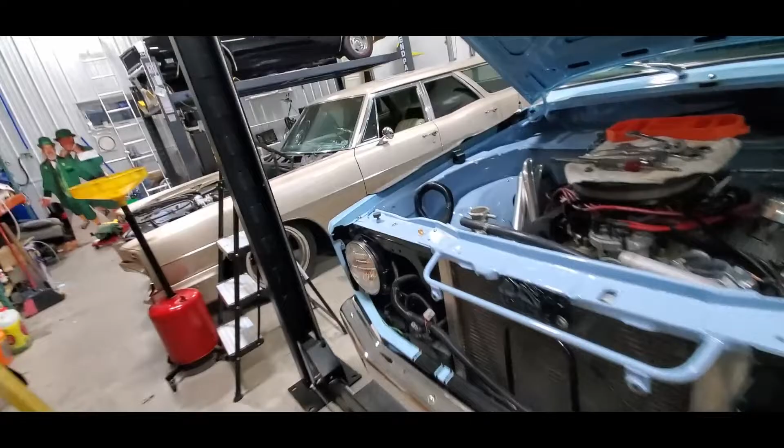ShopDog's excited because we've been out here working over the last few days trying to figure this out. This is actually a real pain in the neck. So every time I've got a few found moments, I've been trying to sort out how we're going to do this. I underestimated how difficult this part of the job was going to be.

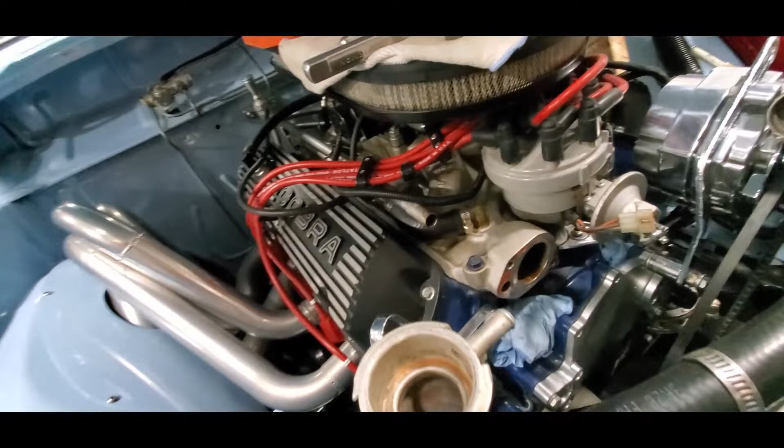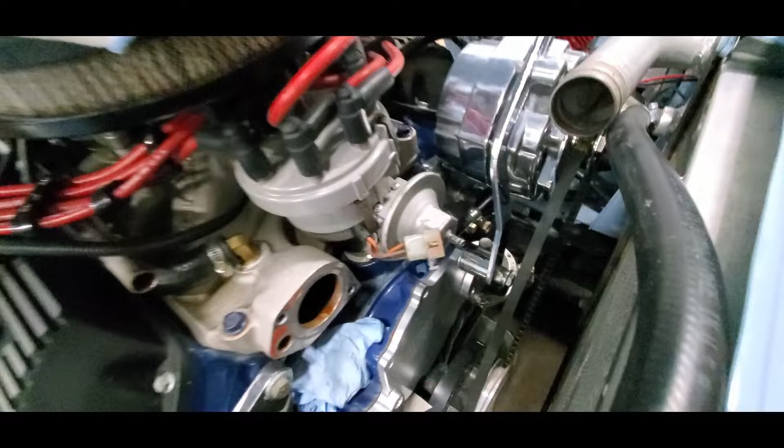Going from that tiny little Mitsubishi alternator, which is probably like 45 amps, to a 100 amp alternator, I knew that was going to cause some issues, especially since we're taking the water pump away. But no matter what I'm doing, I've been playing with different bolts, lengths, offsets, and some brackets off the floor and off the things. You can see there's even a socket there.

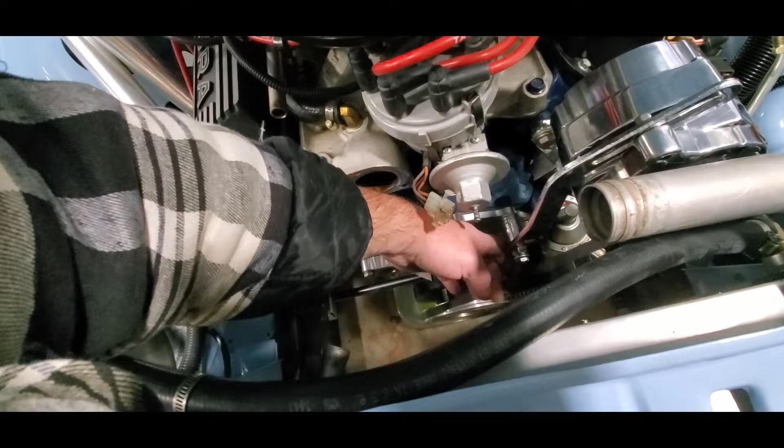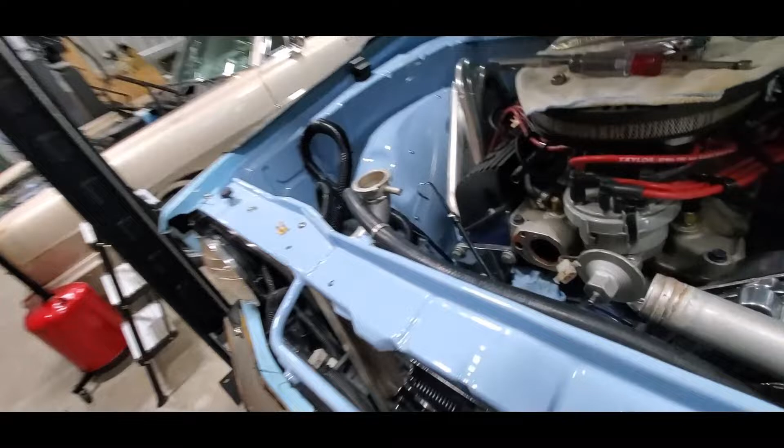This was actually one of the most promising positions that I had found. And then, of course, the obvious thing is the motor for the electric fan interferes here. And I run into problems where I'm either going to be running into this hose or this, so I've still got to pull that out further. The upside is that gave me the best clearance to that hose. But one thing at a time.

This has turned out to be quite the complicated problem to solve. So I haven't been filming it because it's been a lot of me just playing with bolts and spacers and sockets and stuff, trying to figure out where I can place the alternator.

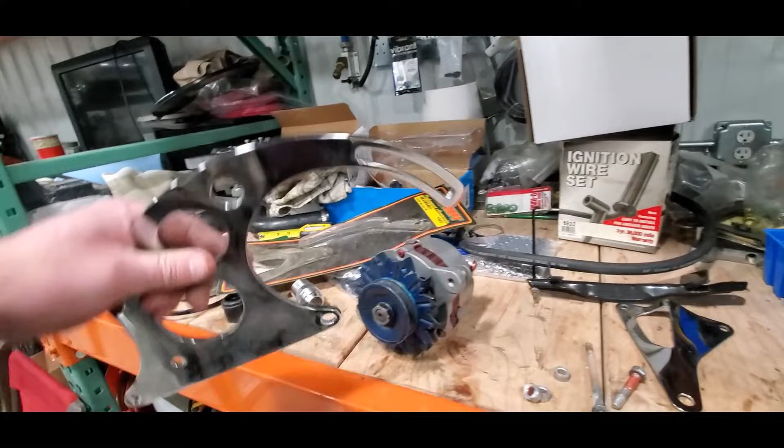I really had hoped to use the original bracket, this thing here, in some way, but this fits this cute little tiny alternator. It does not fit a regular normal size alternator because this looks like it's based on like a 10 SI or a 12 SI. Well, look at the fan, it's a 12 SI case. So that's not going to work out well for me.

So working on that. But I figured I've been putzing on this, I probably got 4 or 5 hours here, haven't filmed anything. And I thought it's probably time to do an intro, because I'll probably putz on it a little more this weekend.

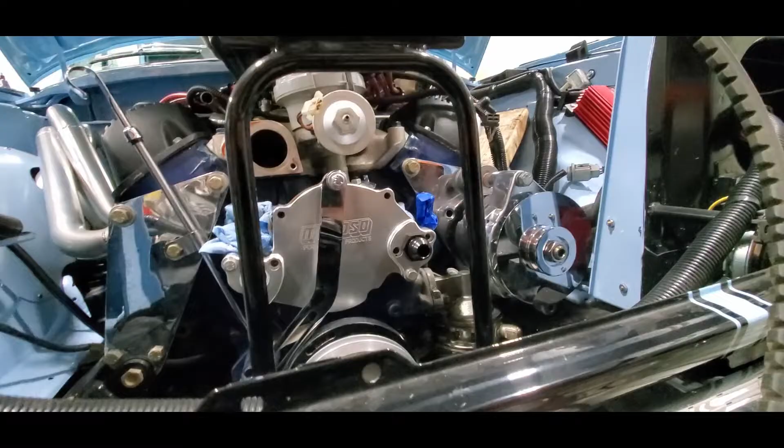Now, this is a spot I have looked at before, and unfortunately I just wind up having to cut too much car away, and then we got to go to an electric fuel pump, and yeah, this idea kind of goes quick. And I've already tried moving it down lower and swinging it out, but then I wind up moving too much of the body, which I'd really rather not.

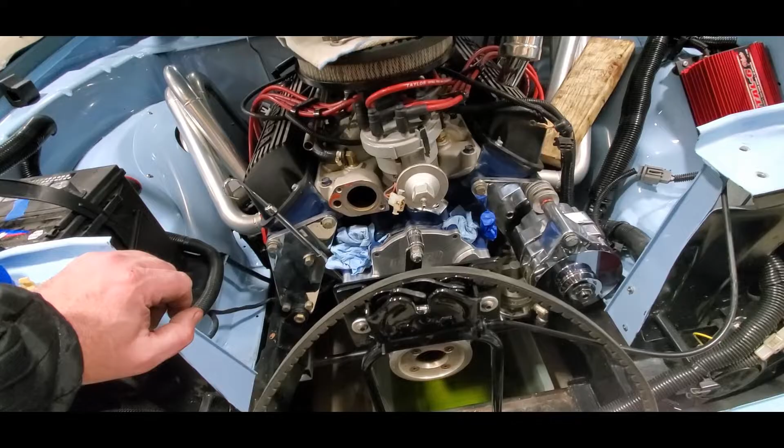And from this point, not a lot of pivoting either. And no matter what, if I use this point and try to pivot up high, which of course still has the same belt problem, I have to machine some of that out. So just still thinking, there's a solution, I just don't know what it is.

But one thing I do know is the back of the alternator cannot be against this plate. It puts us out of alignment by about that much. So still thinking, I'm probably going to have to make a new adapter plate. Maybe I can put this pivot point way up here somehow and pull the belt. Not sure yet, got to think on that.

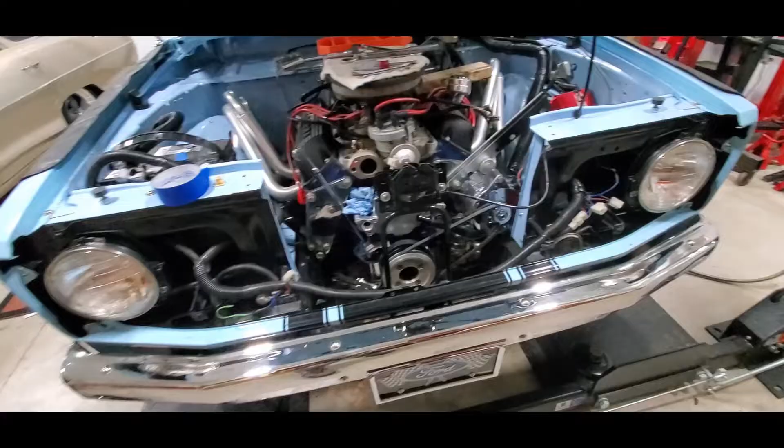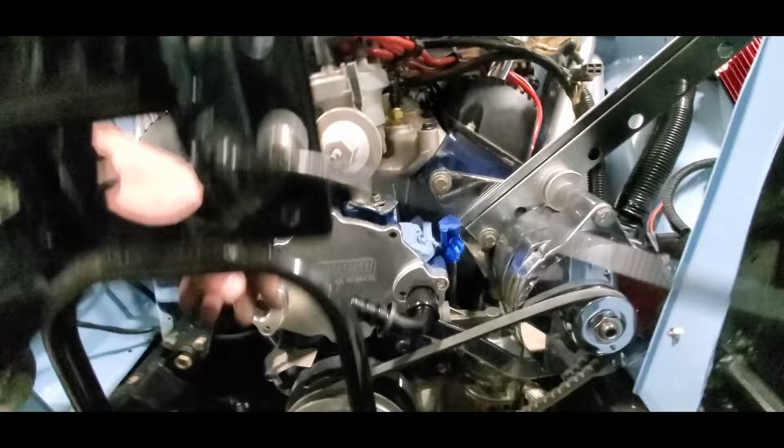Alright, I think I'm heading in a direction I like. So I'm going to obviously have to make a bracket, preferably something that locates at all 3 points, comes out, becomes a solid mounting point that will clear the head. And of course I've got to make sure I've got enough swing room, so I'm probably still going to have to modify that solid mount just so that there's room behind that. Because I can space this out a little, but I would prefer to move the alternator back. So there's some things that have to happen there.

It's not going to be fun, but we might actually just redesign that entire plate to have that mounting point and just have it cut. So that may actually wind up being the best solution.

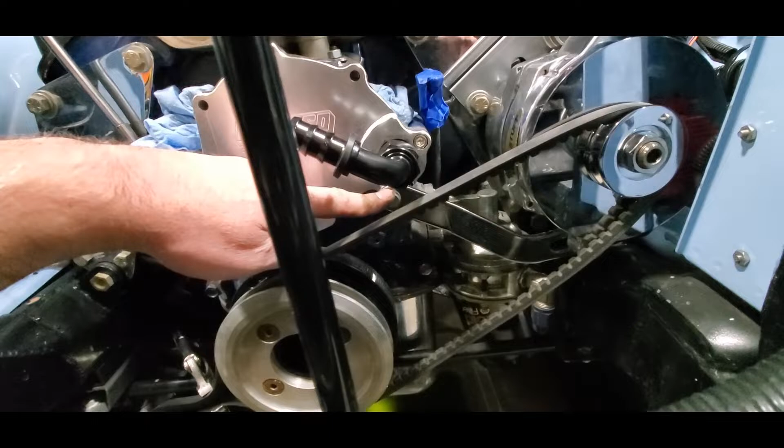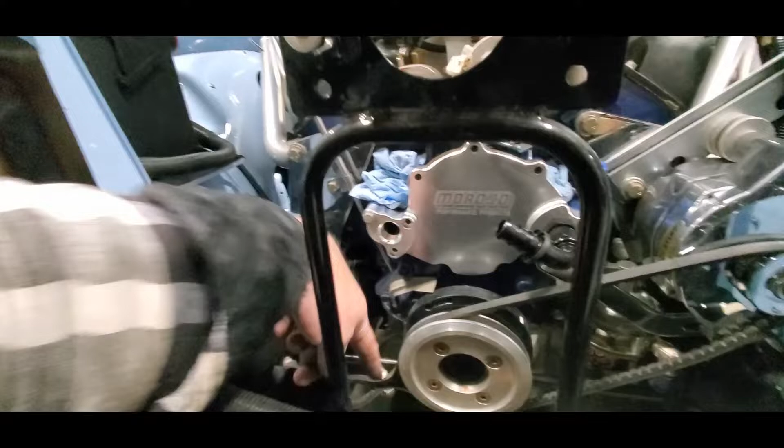I'll deal with that. What I'm looking at is I can use this point as a reference because it clears all of this. I'd want to put a stud in there, because the last thing I would want that to do is slide. You don't want to go loosening because that goes into water. So there is that. So I would want it to be a stud because you got to loosen it to tighten the alternator. But then, if I had the right length belt, you can slide it a little bit.

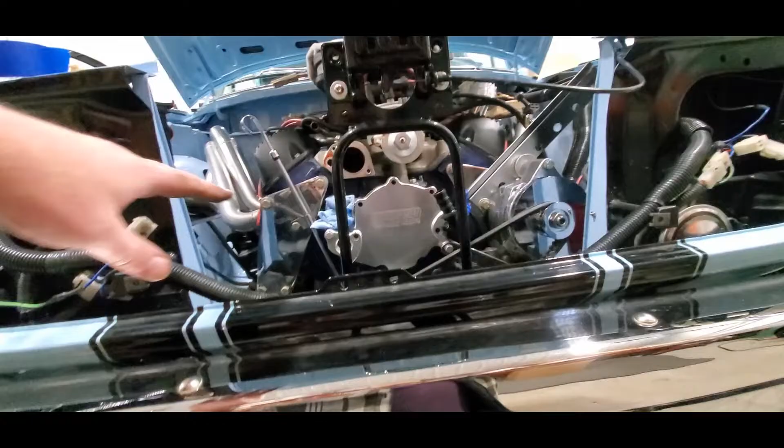The easiest way right now is like that. And that would clear, not only would it clear the hose and everything, I'm pretty sure it's going to clear everything. Give me a minute. Looks like that would give us plenty of room.

So putting it flat up to the top gives us gobs and gobs and gobs of room to the crank. Gives us plenty of room to run our hoses. You know, got to get creative with the angles, but that's why we bought so many angles. And like I said, if I had to shim that out a little, I can, not a problem.

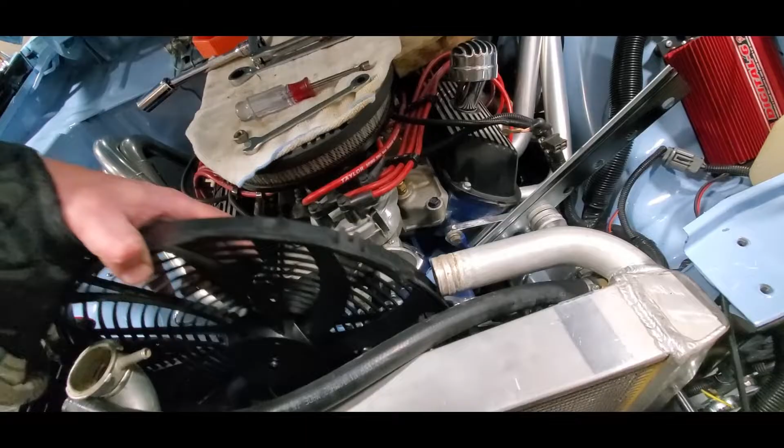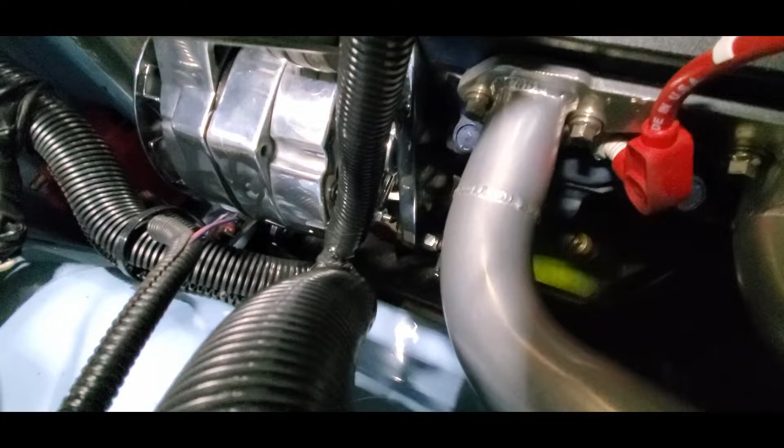So that shows us where we still have to deal with the water pump, and obviously I've got to design this plate. It's not going to be fun, but I wonder if those dimensions exist online or if I'm going to have to trace that and pull it and make measurements of it. That's probably what I'll have to do. But once I do that, if we just cut a new plate, yeah, it won't be chrome, but that's fine. I can put the bolt and swing point wherever I want it. That actually wouldn't be a bad deal, because that's the front motor mount for the motor plate.

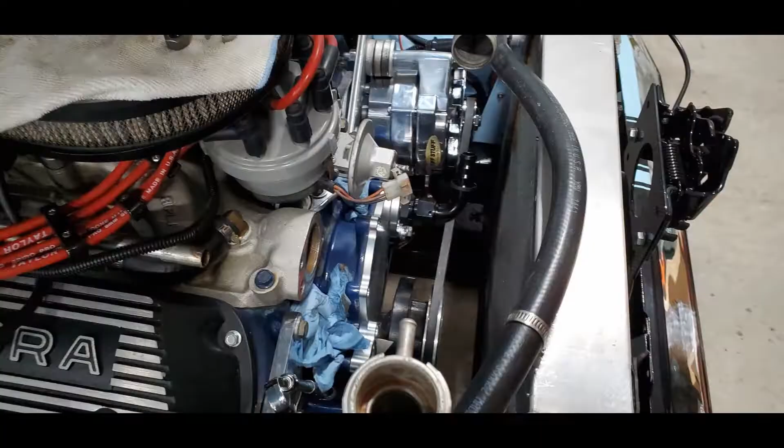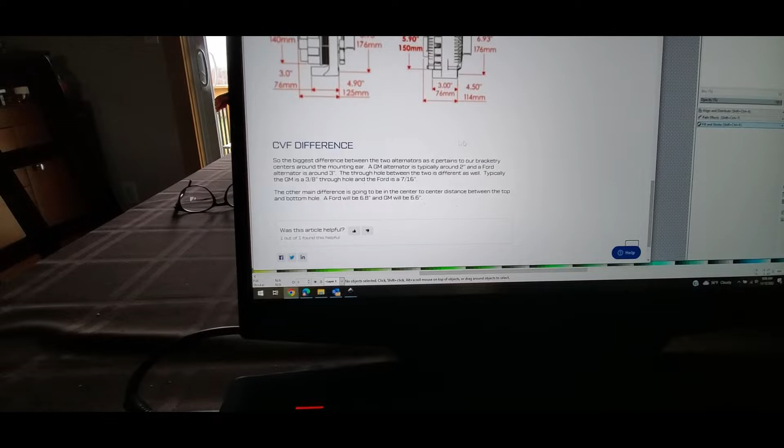Okay, I've started the modeling based on the alternator we have, which looks exactly like that because this is the part number, that's where we bought it. So when I go to CVF, who I trust for dimensions, they say that a 1G case has these dimensions, and the 3-inch thing I don't care about. The big thing being the 7/16 hole, and it's going to be 6.8, whereas GM is 6.6. That's all fine. So this is the top hole, the one that's got that 3-inch bit.

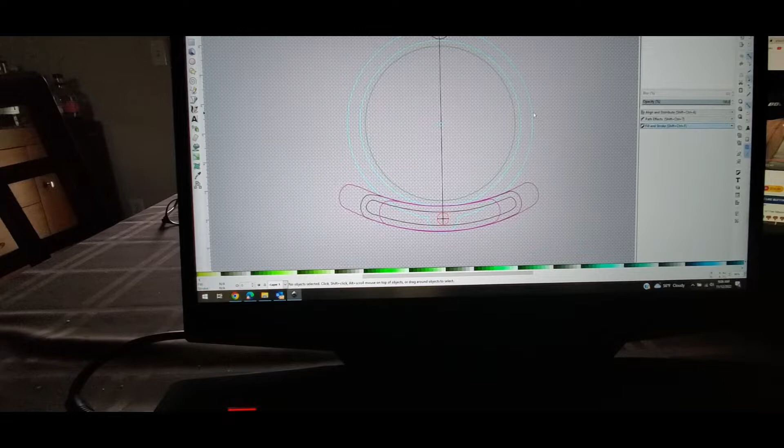This is the alignment hole. This is the slot that I've designed. So if I take that, you can see, so that's going to be the channel right here. This channel right here is the slot.

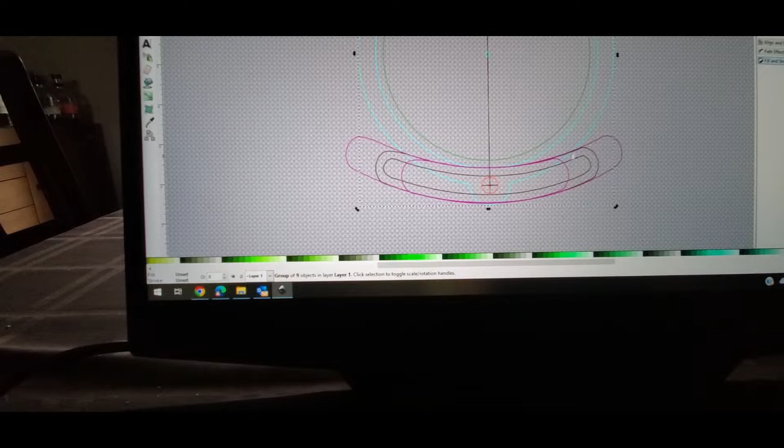Unfortunately, I can't get as much width here as I'd like, but this should work. I don't know where my bounds are yet because I don't know where the mounts are yet. There should be a hole here, a hole here, and a hole here, and then the plate going down. I've also got to measure this because I need to make sure the plate clears the back side of the alternator.

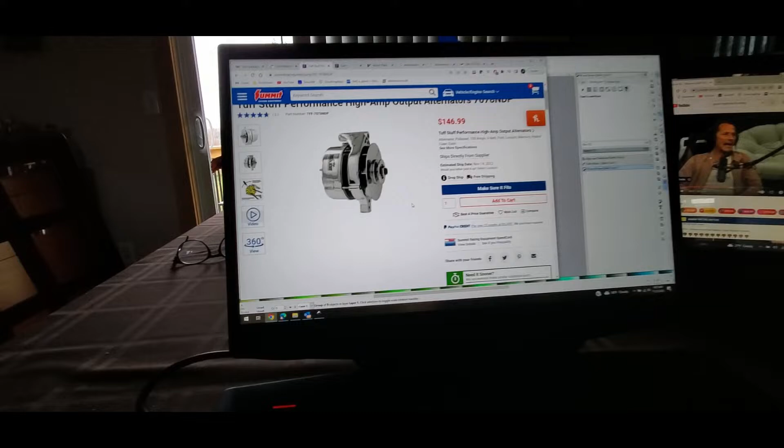That looks like they're not going to show me, are they? Okay, well anyway, you've seen the back of the alternator where the bearing rides. So that's one of the things I've got to work on.

Okay, before I start looking at what my limits are, because obviously that fuel pump's going to be one, I need to verify my alternator. I'm also looking just to make sure I don't have any other issues. I think there's nothing, if I can keep it mounted low with the radiator and the fan, that's a concern. So I'm going to go ahead and get that out of my way.

The next area I'm curious about is obviously right down in here in the fender well. So let me look into that.

Okay, we're still trying to verify exactly where the hole is. So I made a little—and this is too thin, this wouldn't work—but made that because one, I'm going to need to know where the notch needs to be here, but two, I'm really trying to locate that hole to a known position. And if it can be in plane with these, that makes it a lot easier.

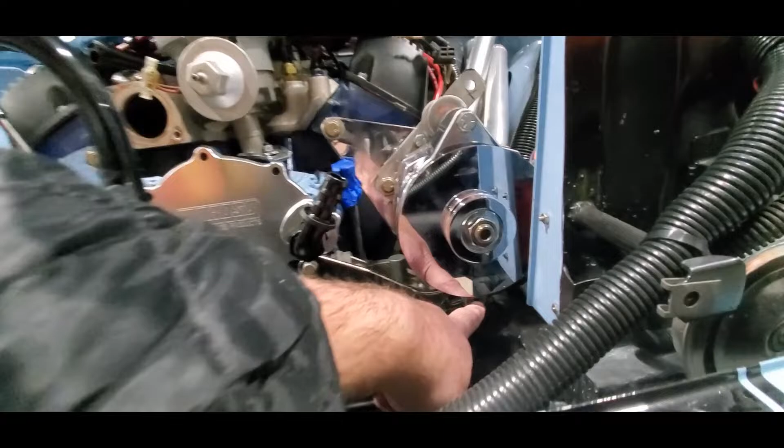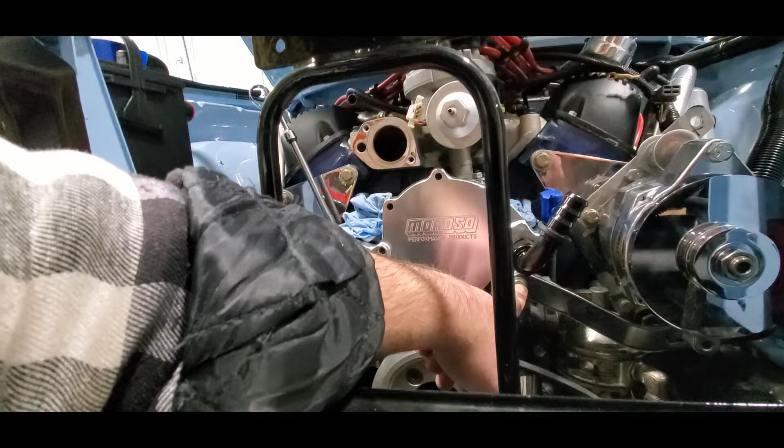All right, this is for in my head. It's not going to be fun to measure, but you see this slide down here, maybe you guys can see it. I don't really want it referenced here. This is one of the long bolts that goes into water, and I don't want that to ever have to get loosened. So what I'd prefer is maybe we take these two bolts and kind of reference that. It arcs down, comes over, and then becomes that little cradle, kind of like what I've drawn here.

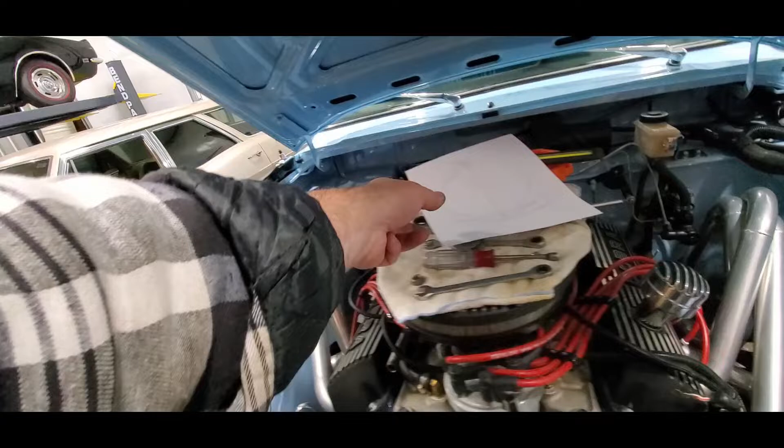Ideally, I want to be able to put the belt on with it in this position and have the belt tight between here and here. You can see when we come down here that I actually have quite a bit of room off axis. Remember, I'm going to move those wires—they won't be there. Won't have those next to this spinning fan.

In fact, right now, I can't really come in any further than that. I'm not sure what I'm hitting. Nothing over there, could just be the end of something, but it doesn't matter. So get the belt on, boom, tighten the belt, that's the idea.

So, ShopDog just said someone's here. Just a little update here.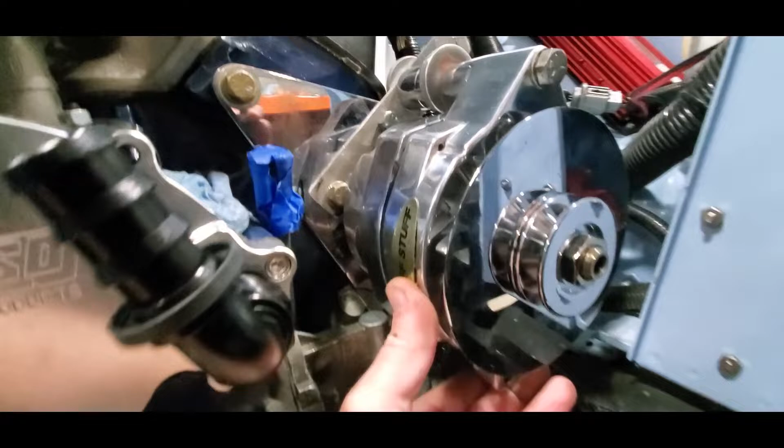Okay, I've got that bracket off, and I just wanted to check my extremes here. You can see I'm hitting something here, I have to figure out what. Oh, I think I know what. Yeah, that was just that stud, which could always be re-indexed.

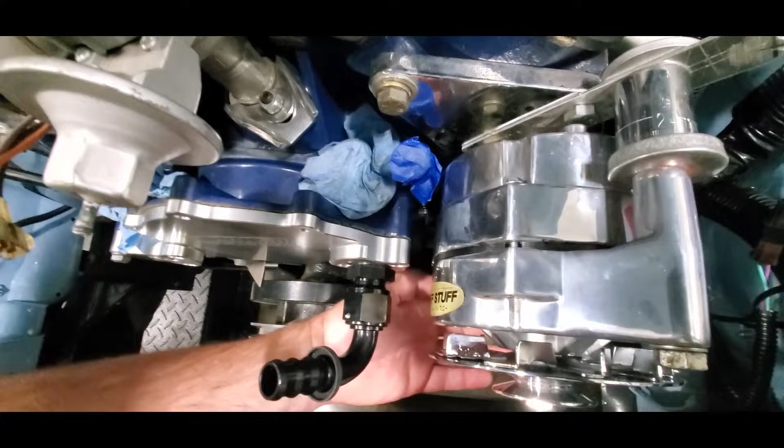Okay, so you can see I'm that far in and can go that far out. That is a lot of adjustment room from that point. I can clear the fuel. I think we're going to wind up with a user serviceable filter here, not the one that comes apart that we have in there now.

Oh crap, I don't know where I set it. Anyway, it doesn't matter. It unscrews and obviously can leak, because that happened to us. So we don't want that.

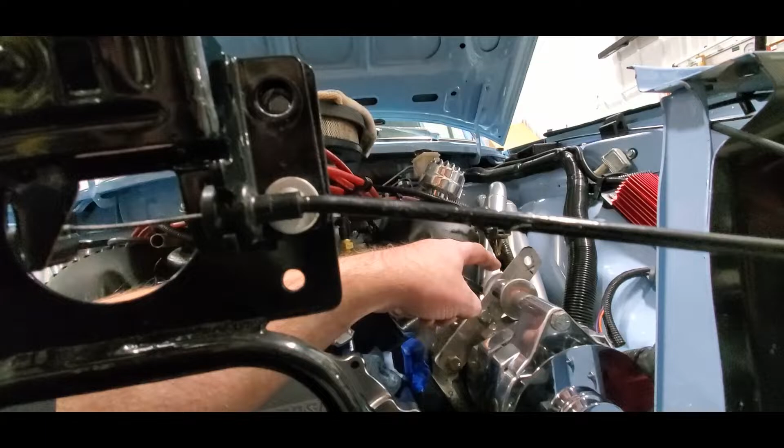So I think this is definitely—I like this hole location. It frees up a lot, especially if I'm going to go ahead and hog out the plate. The other thing is, of course, I'm going to square this plate up a little bit, because once I take some out of there, I don't want to lose any strength, and there's really no reason not to go ahead and do that. So we'll do that.

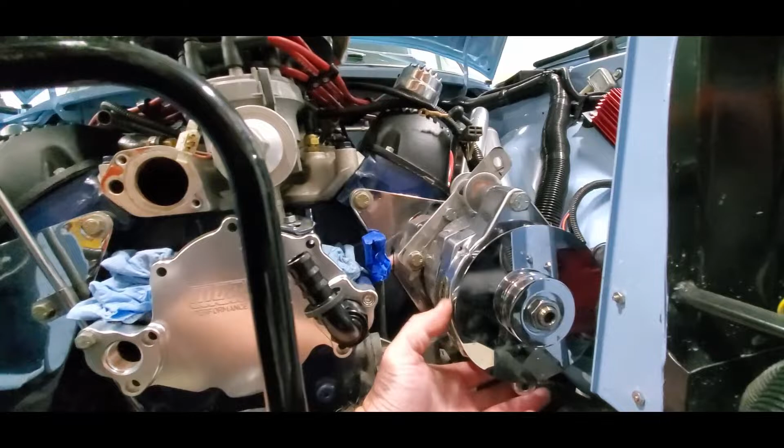You know, none of these locations has serious implication on the belt. The belt is not an issue for everything I'm doing. No issues at all for the radiator.

So the next thing I got to figure out is make sure my arc is correct. How do I reference these two points? Get something down there, allow myself the ability to offset it.

Yeah, I think that's the next thing. There's a chance that there might be little spacers here, and just move that bracket in and out to wherever the backside of that is. So that's really the next thing I got to figure out.

Oh, and don't worry that that's leaning. It'll actually be right here. But that's going to give me plenty of room. You know, and you can see that's why I want to have that little slot back there.

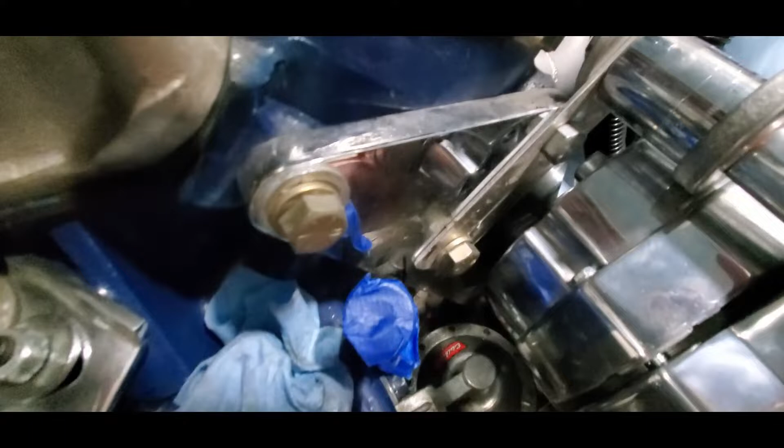So, yeah, this is going to work. I may even still be able to do it with regular bolts too. I was worried that I was going to have to countersink these two, but I may not have to.

ShopDog has asked for another pretzel because that's on his list. So we're still working that out.

I think I've got an approach though. I think this is going to work pretty slick. There may be better ways to do this, but I'm using a little cardboard aided design here.

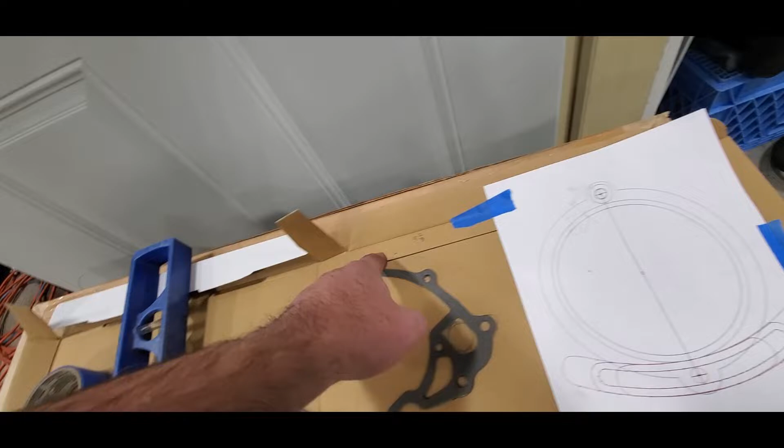So by knowing where that is and where this is, I can then take a gasket, get my other hole, make my measurements, get all that, get my locating point. Then I stippled all those so that I could draw that out.

And now I'm going to draw out the shape, cut it out, and then hold it here to see if I'm even in the ballpark. I mean, I could be way off. So that's the next thing I need to know.

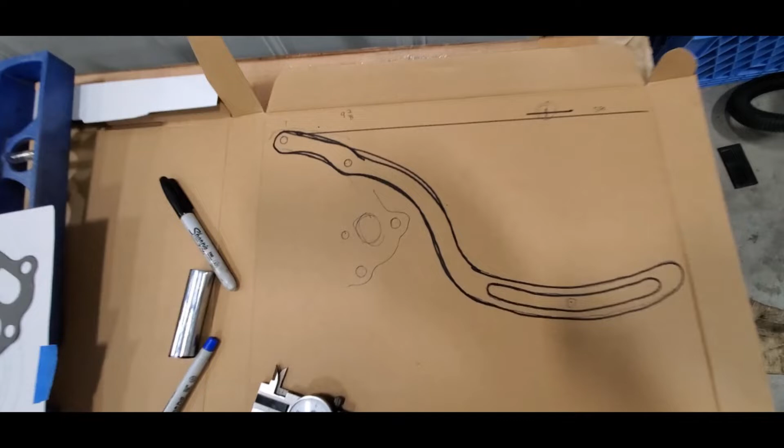So that's my rough design. Let me get that cut out and let's see if that's even going to work. There is a reason we use cardboard for this kind of work.

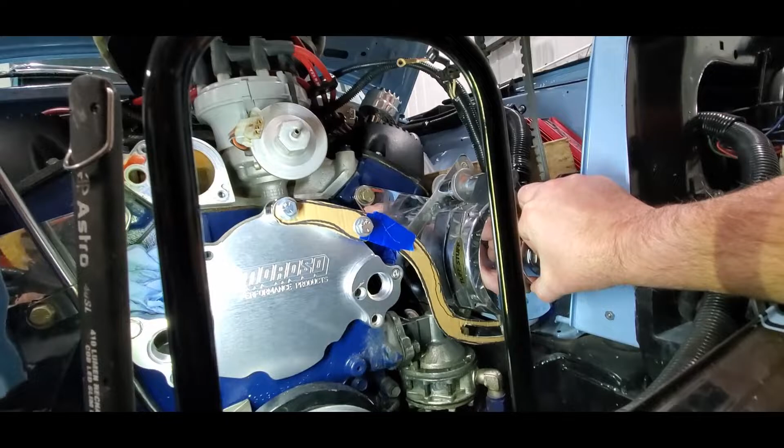So you can see if I've got that squared up, that will slide. Hopefully you guys can see. Let me try to move you in.

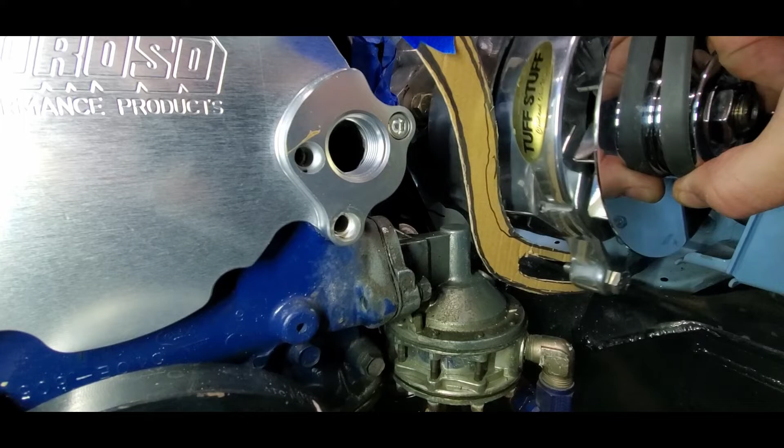Boy, that's a difficult thing. So you can see, and also that's my limit. I'm going to change the end of that. And that would more than clear there.

This spacer will change depending on how far back in. That winds up having to be to line up the pulleys, because you can see we're a little out, but it's irrelevant right now. The other thing I'd want to see

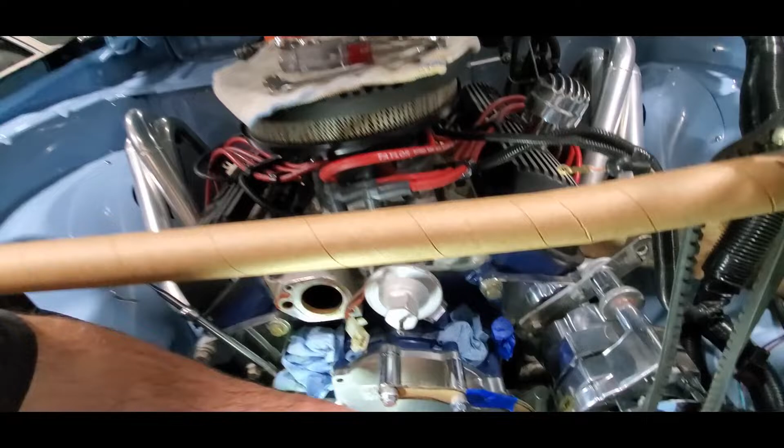is this even going to be an issue? I don't think so. Come on, you. There you go. Yeah, that's not even going to be a problem at all.

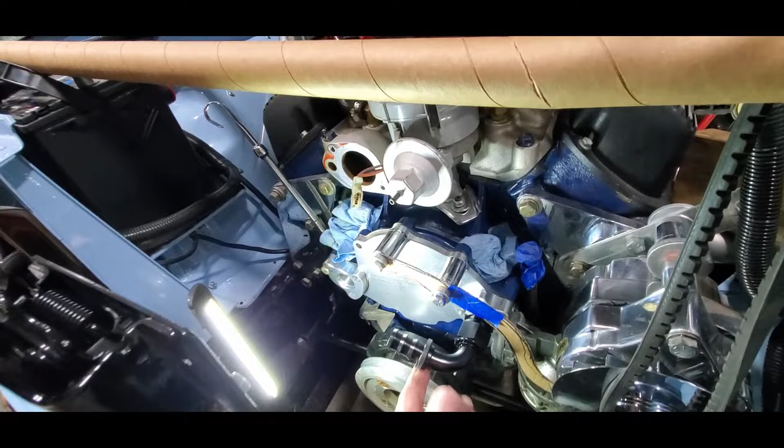So, yeah, so that's probably going to arc up and around. I don't know how we're going to do some of this, but we'll get there. Look at that. I think that's actually pretty close, but that's why we do it in cardboard.

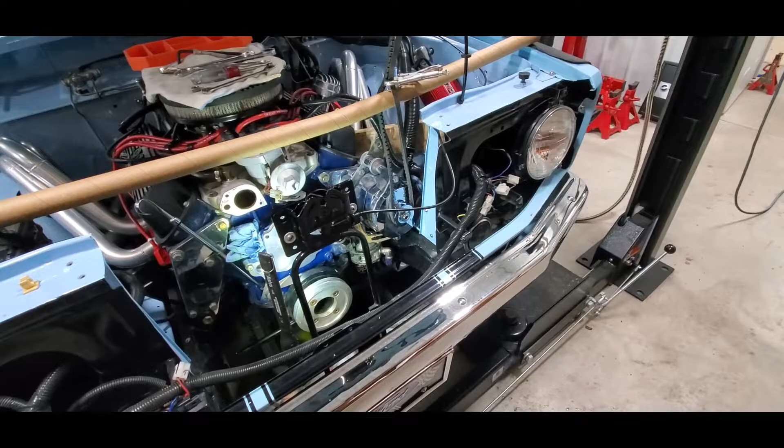Also, you'll notice I've got a line drawn here. That's because for very little effort, I can get more adjustment range if I notch that and just kind of bring this around more. So that'll kind of come down and then over. But this is more than enough adjustment room to do what I want to do.

So I'm getting really close to being able to bring this into the computer. In a ShopDog short, I have a solution. Let's throw a little light on there.

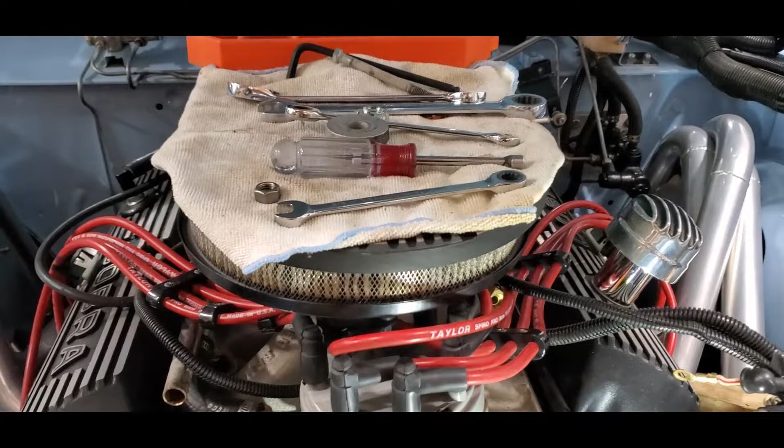Now, these aren't the right spacers. That'll have to be changed. I've got to make that bracket. I've got to remake this so that I have a hole here and

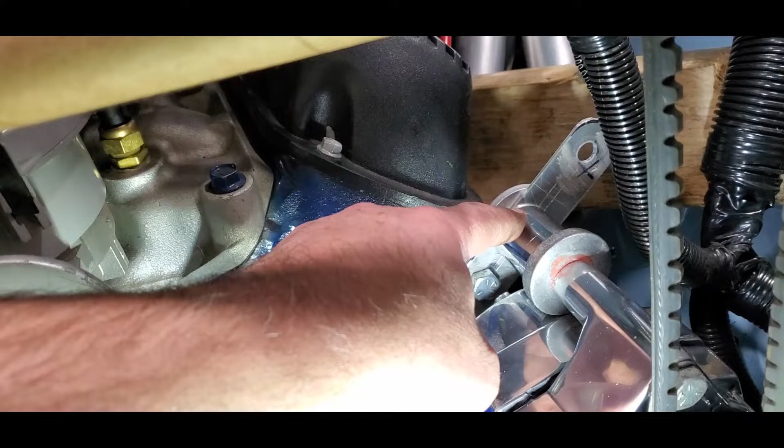so that it will clear the back of the alternator, because you can see how that is, because it's too far out right now. But you can see that'll work. That'll work really slick, and it gets the belt down away from our water and away from our electric fan.

That's what we're going to have to do right there.

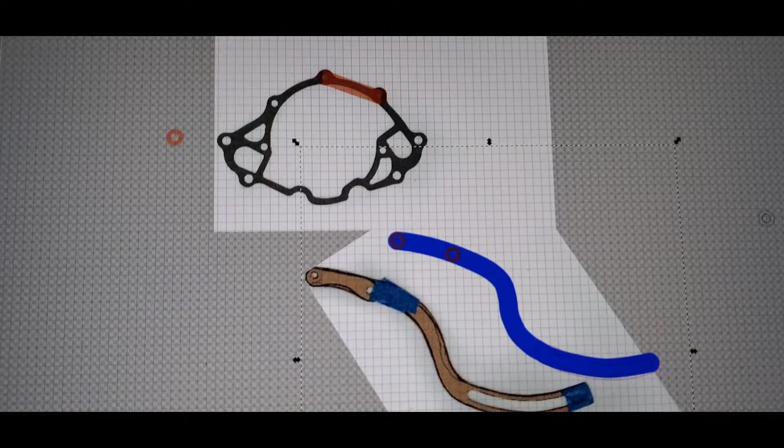Pretty cool. So we scanned those, dumped them in here, drew over, and here's the, I don't know if you can see it, there's that alternator, so got all that in there. Then that gives us the actual arm, which we then are going to cut out of some draft board and go out and try it.

So in just a couple moments, we'll have something to test with. It is a handy tool.

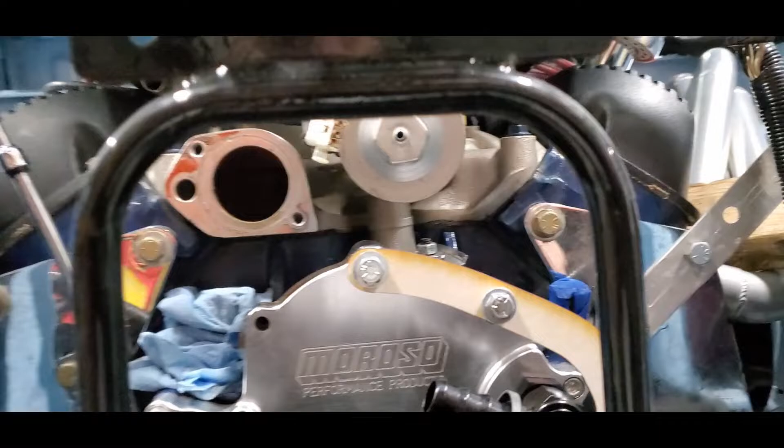Here is that, just using some sockets. Remember, we're just spacing her out, so you can see that clears the frame. And remember, the engine's going to want to torque up, but with that motor plate, it shouldn't be able to really go anywhere. So next, I want to go ahead and put the alternator back in.

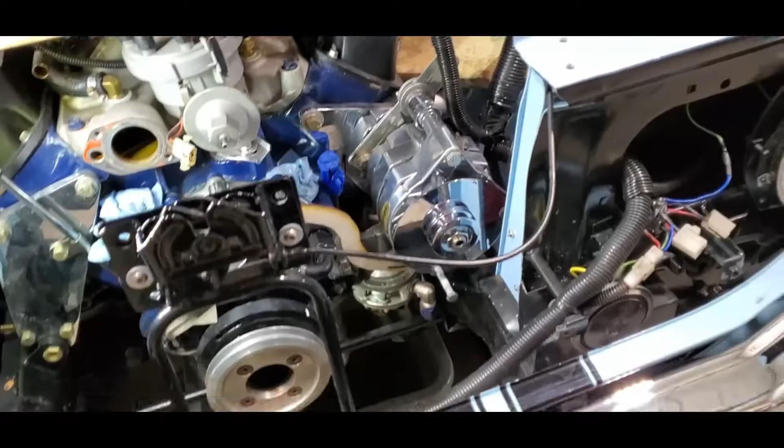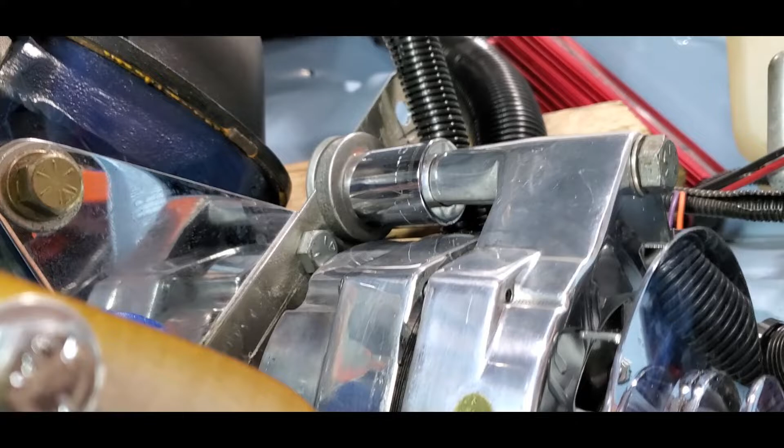Alternator is back on there. Now this obviously isn't the way the bolt normally is. I've got that just lined up as a pin to show us. Now you notice that's sagging a little, so if I pick that up just a little, make her square.

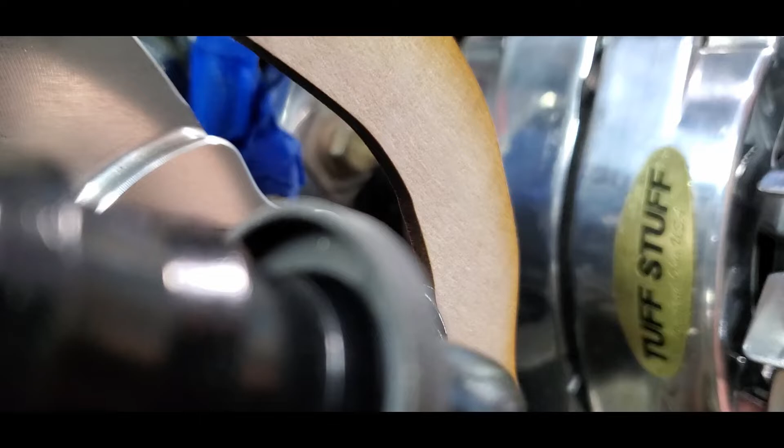Look at that. So remember that notch I wanted? And then let's see, all the way out is too far. See? So that's what we want. Too much.

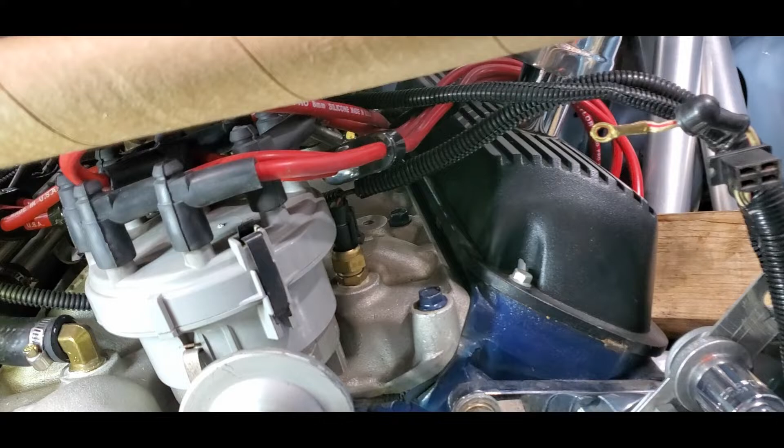Honestly, I can probably even shorten that bracket a little bit. But this is going to work. So the next thing, of course, is this plate's going to have to come off. But that's probably not going to happen right now. We'll come back to that in a bit. Anyway, that bracket's going to work. Goes around this, no problem. You could still get in there and tighten that up.

And gives plenty of room for us to actually put our filter. I'm real happy about that. So we'll have our fuel filter right here. Tons of room. Okay, the next thing I think I'm going to do real quick, just to verify everything, just to make sure.

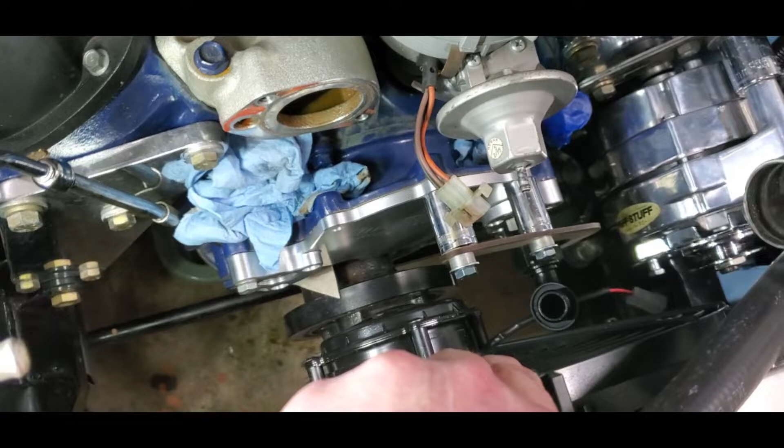Is I'm going to slide the radiator back in. Turns out, plenty of clearance, so much more than there ever was before. Now, obviously, I don't have all that in there, and I know that's going to take up some space, but this will work. So, pretty happy with that. Don't know how much closer or better we could have gotten that.

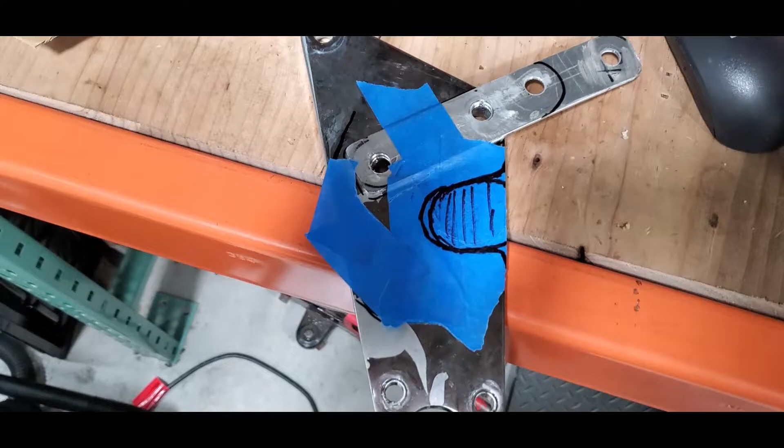That is the bracket we have to make. I've got that sitting on some wood, keeping it up out of the way. So, shouldn't go anywhere. But yeah, that's how motor plates work right there.

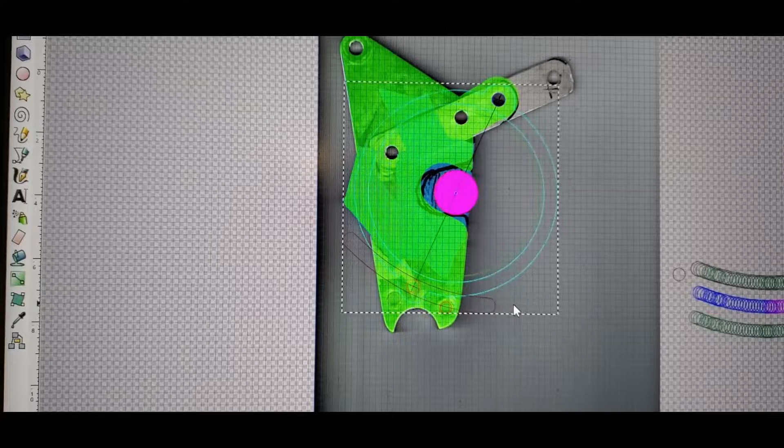Right, I think I'm getting pretty close here. Ignore the blue tape. If I drag that, you can see the back of the alternator now clears the green, and that green is the new bracket.

So that slides pretty nice. Pretty happy with that. Okay, so using half inch plate for the mount and quarter inch for the arm, that would be $106, not including shipping, for 2 sets.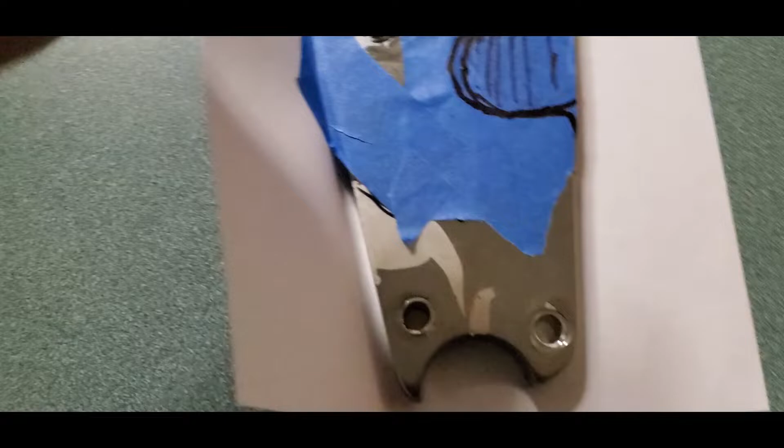I think I'm also going to design some various spacers, and I definitely still want to cut that out of draft board and go verify it. I have printed it right here, so when I lift that, you can see that all the holes line up. That's exactly what I'm trying to do, so that looks pretty good. I'm pretty happy with that.

So that's kind of where we're at. And here you can see the new cuts on the plate and the arm. A little more clearance on the arm now. Obviously this won't be the right spacing, and this obviously isn't the right thickness.

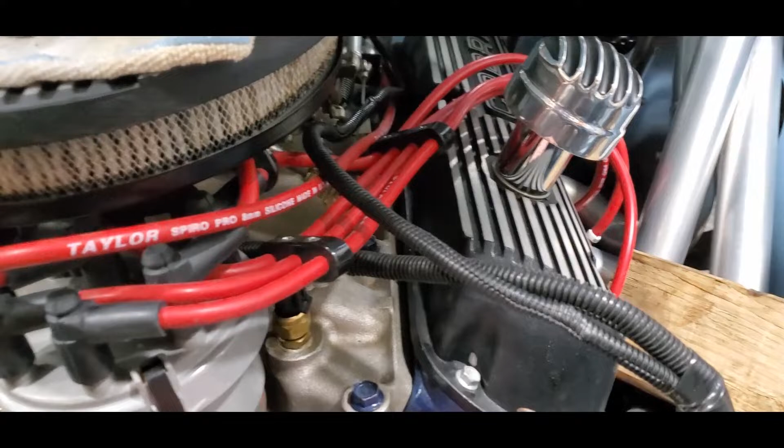And yes, I do know that this is aluminum. I'm still ordering the plate in steel. Oh, can't see my hand. Here, let me zoom out. I'm ordering it in steel. We're going to do all of our development that way.

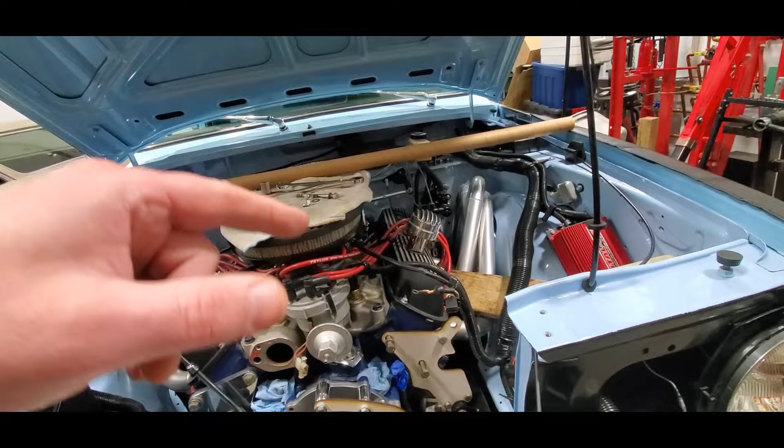And then later, if he decides he wants to have a piece chromed or redone, or whatever he wants to do, polish some aluminum, we already have it. He can do that, and then that's just a day of dicking around swapping it. But for now, I'm going to do it in steel, because if I have to make any changes here, I can weld steel. I can't weld aluminum. That's just not in my skill set.

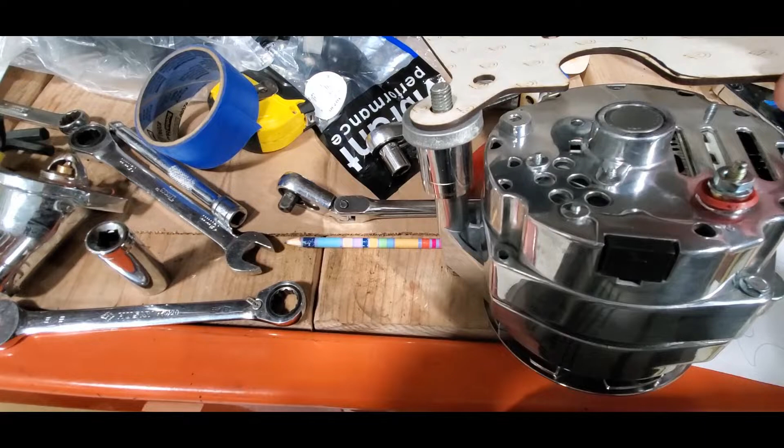All right, and based on just that last little bit, it looks like I need just a tiny bit more clearance here to make that as easy as I want it to be. So we can go in and fix that. It's not too big a deal. Pretty happy with our adjustment arm. I have absolutely no idea how you're going to get a tool in here and adjust it. You know, that's a different fight.

But you only got to do it once, right? I'm very happy with the other fitment. All of those bolts just lined right up, not a problem at all. So this is going to work. I'm going to go monkey around with that.

Kevin and Cheryl should be coming up pretty soon. In fact, I've got the heat running, getting it nice and warm in there so she can work on her vinyl.

And yeah, I think this is going to kind of wrap up a Courier video. I'm going to make a few minor changes here, and I think we're going to send that order off to SendCutSend and get that moving. And with any luck, we can get that pretty quick.

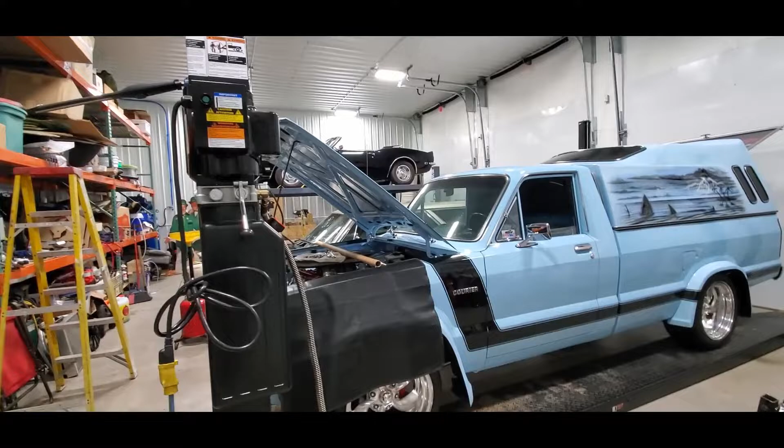And just as an addendum, you knew I would cut that other piece. So, I trimmed out that little C for the back of the alternator. I'll go check it out real quick. But yeah, I figured I better cut it. What's it cost me? Nothing.